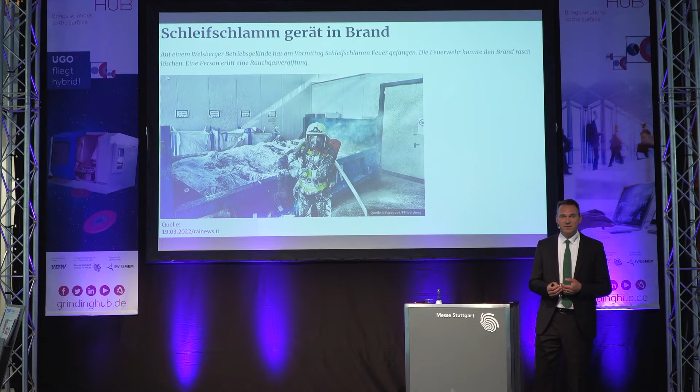So on one side you have the ecological advantages of treating it, and on the other side you can lower the risks of catching fire, damaging the company, or even injuring your staff.

Dr. Helmut Sihler, the former CEO of Henkel, made a good statement some years ago: we have to integrate environmental standards into the daily working processes. Today this is even more relevant than when he made this statement.

If you want to succeed in the market, these standards should be implemented, also looking at your customers and public relations, because no one wants to buy products from you if you have bad news, or your products won't be as successful on the market if your customers feel you're not ecologically friendly.

So what is the state with your sludge at the moment? You collect it at a tooling machine, at a filtering system. You have to sort it on one side, collecting afterwards the separation - coolant, water-based or non-water-based, the material mixture - is it more steel or aluminum grinding sludge.

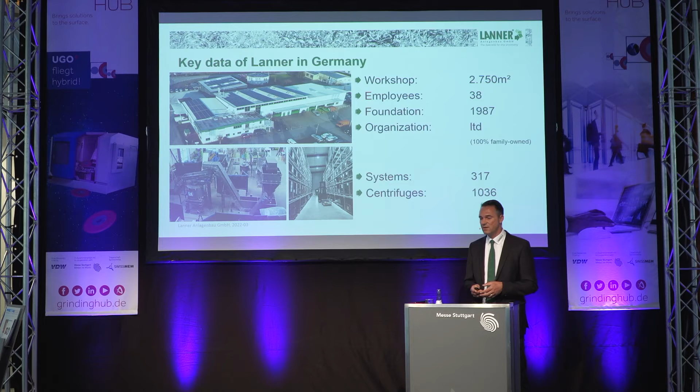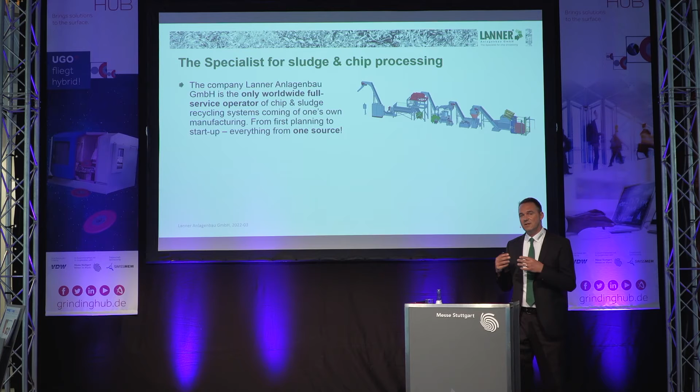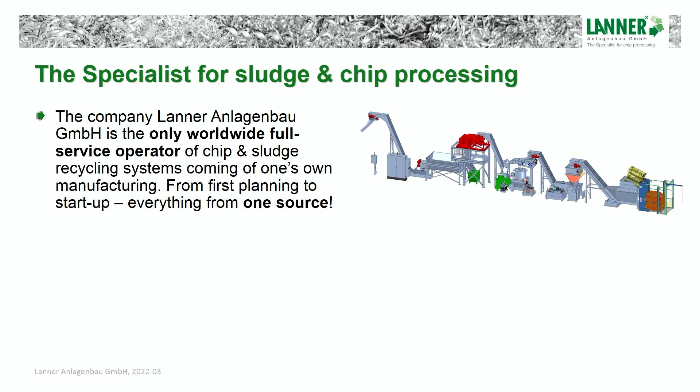We're the only worldwide company supplying such machines and systems from one hand. We produce all these kinds of machines - conveying tanks, crushers, centrifuges, screening, and also separation technologies and container loading systems.

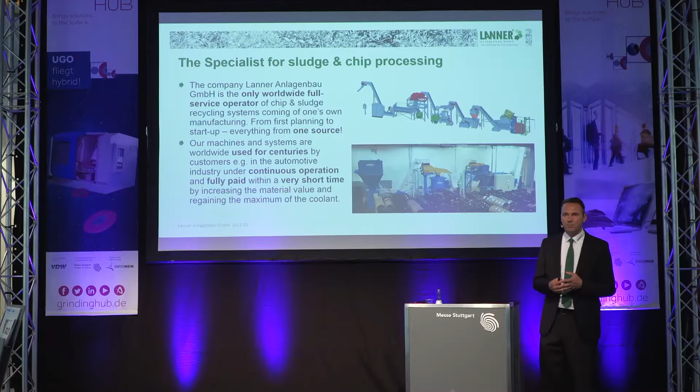This is what it looks like in the real world, back again from the 3D modeling. These systems have a very short return on investment because you're increasing the value of the chips or lowering the disposal costs for the sludge. On the other side, you get coolant back which can be reused many, many times - with oil, nearly an endless recovery and usage.

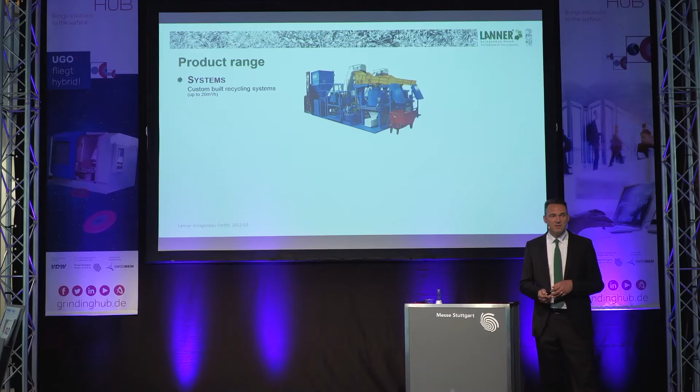We produce systems for up to 20 cubic meters per hour - small turnkey ready systems which come plug and play up to 2 cubic meters, and for the same amount per hour, briquetting presses.

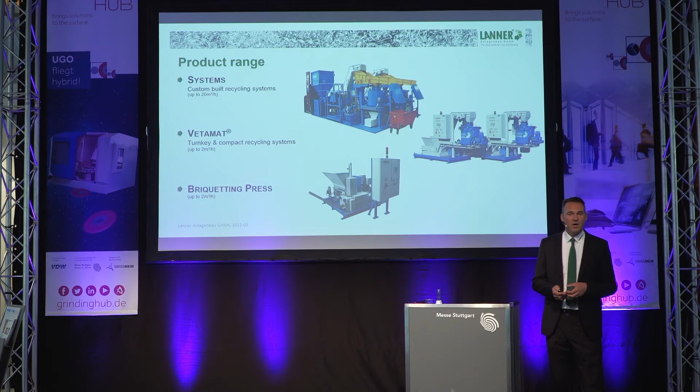So where is the sludge coming from? Of course, from the machining process where you're manufacturing your parts or tools. We collect it via a chip cut or a conveyor, or from the central or decentralized filtration system.

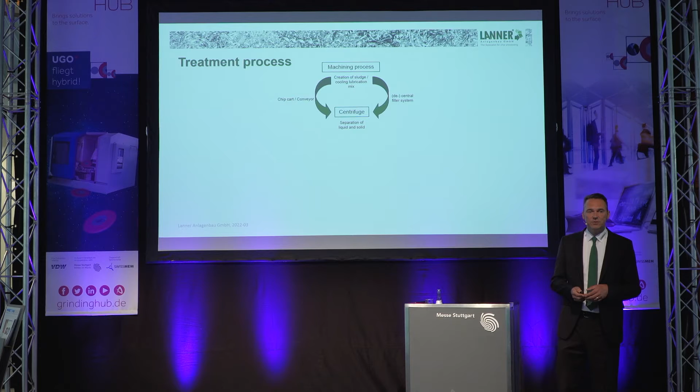It can go to the centrifuge where we separate via physical force the liquid from the solid phase. The centrifuge sludge can go directly also into a briquetting press to press it to a solid briquette and squeeze out the containing liquid, and then this can go to the foundry or the scrap dealer.

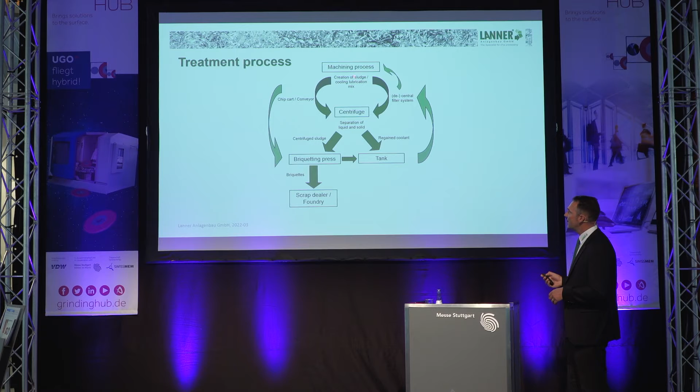The regained coolant is collected in a tank, going back to a filtration system to filter the particles, depending on your demands on the filtration and on the tooling system, and also reused. So we have 2 cycles coming from the separation. On the one side, regained coolant, and the other side, the solid material.

First, the centrifuges, which can be used for treating the grinding sludge. Lanner is producing 3 types of centrifuges, but only 2 of them can be used for the grinding sludge. The first one I want to show you is the ME Batch Centrifuge in detail.

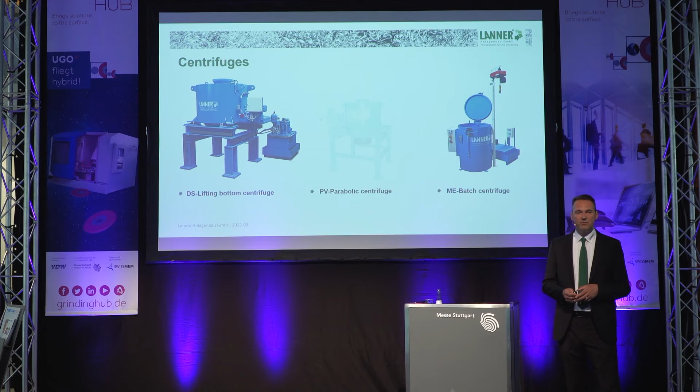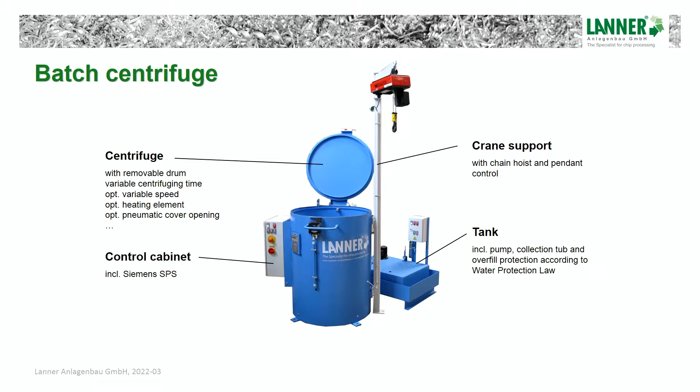It's a very simple system. It can be manually loaded, and if you only have a small quantity, this can be the solution for regaining the coolant from the wet sludge.

This is now a small video. We do it. You can start. Perfect. Here, this is made in our company.

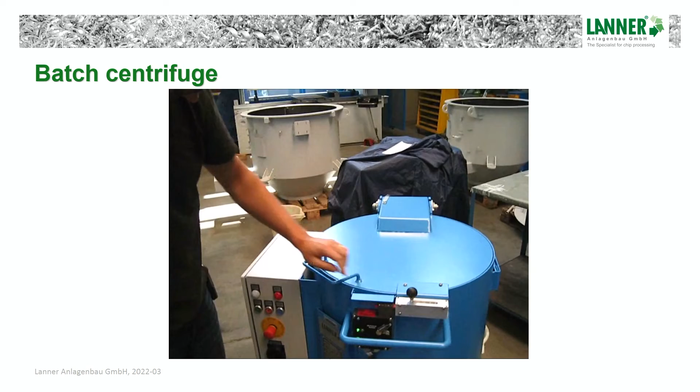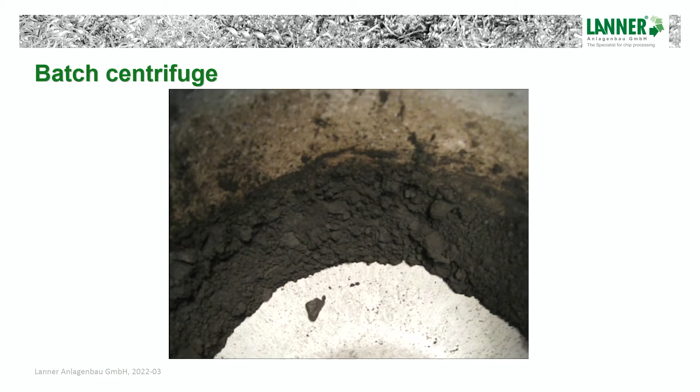You put a wet sludge into the drum. You manually close the lid and start the centrifuging cycle. The cycle time can be set up upon the demands. When the cycle time is over, the sludge is nearly containing no liquid anymore.

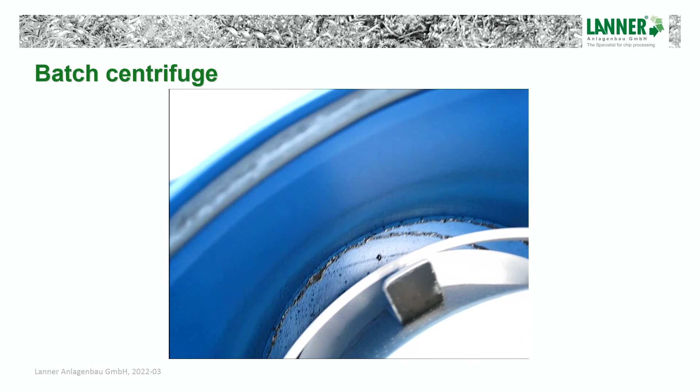The liquid here collected in a small basket and still here in the housing, so you can see there was a separation. Afterwards, you take the drum out and repeat.

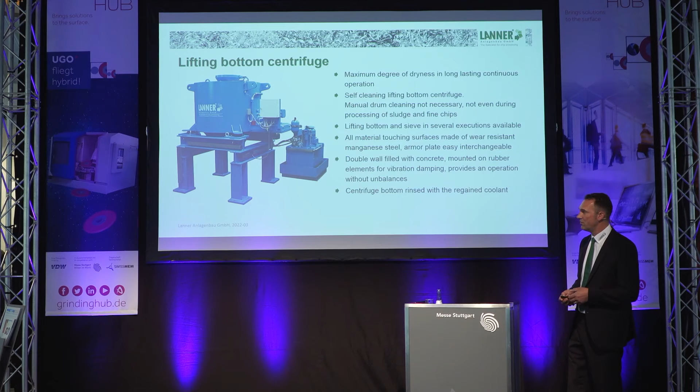The centrifuge here is working continuously, and we have here the material coming from top loading, and the dried material will leave underneath into a cart or a conveyor underneath. The function of this centrifuge is shown here step by step.

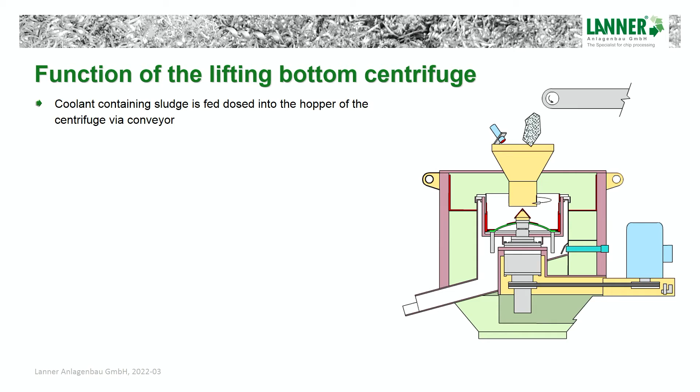The wet sludge enters from top into the rotating drum. We can achieve here about 300 to 400 G, meaning 300 to 400 times the factor of the Earth's gravity. With this force, then the liquid is separated from the solid phase.

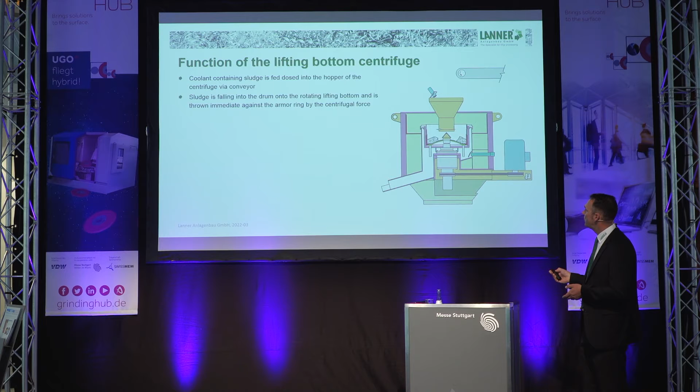The sludge is entering the drum, and through the rotation it is pressed against the wall and forming up ring-shaped. In the lower part of the drum there is a solid ring to catch the impact, and the lifting bottom is pushing this ring upwards onto a slot sieve.

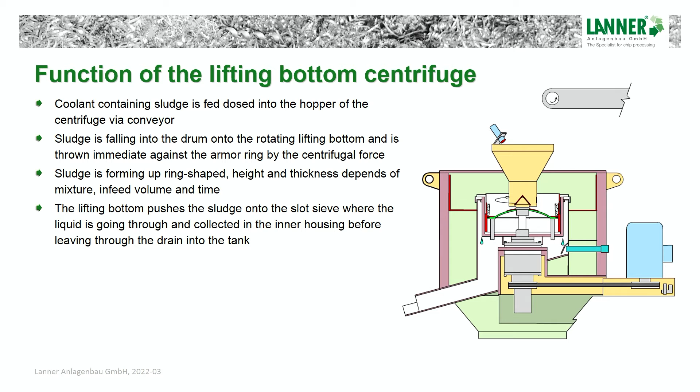Through these slots the liquid will go through and get caught inside the inner housing, leaving the centrifuge. When the lifting bottom is returning into the lower position, this ring stays on the sieve, and with the next cycle this ring is pushed upwards onto the sieve further up.

So we have here a very long time that the sludge is staying on the sieve, and we can achieve as much drying as possible with the centrifugal force. The liquid is separated. When the dried sludge is reaching the top of the drum, it will be thrown outwards.

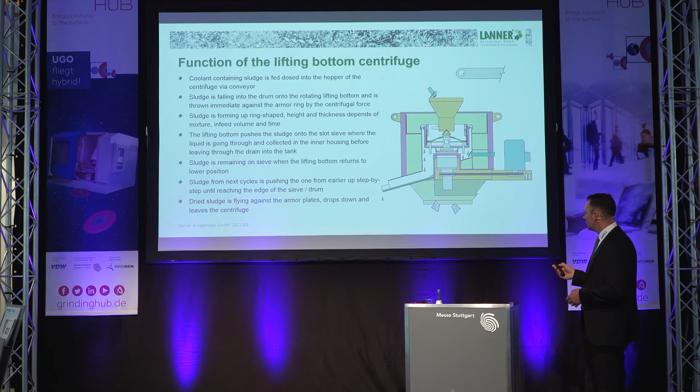Against the inner housing, it will drop down and leave the centrifuge. The cycle time here can be set, but as long as possible, and the thinner this ring is, the better the drying will be at the end.

This is now showing a video of the machine in function. The lifting bottom, you can see here in the center, is moving up and down. In this case then pushing the sludge up onto the sieve.

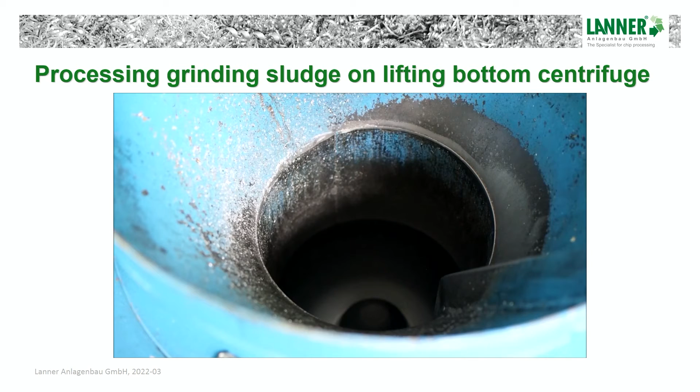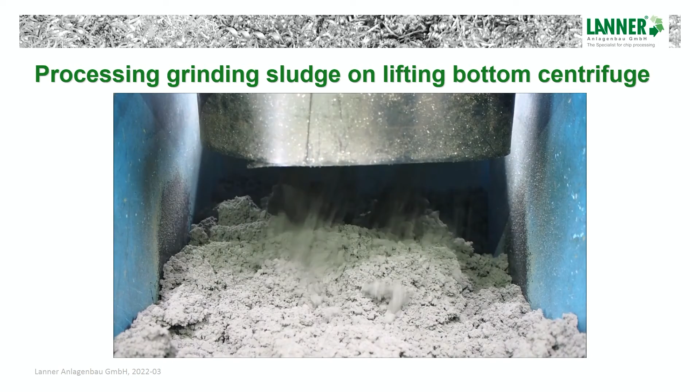New wet sludge was always added manually. This is then underneath the centrifuge. You can see the color has changed, the oil has been separated, and the volume increases a little bit because it's not that dense anymore.

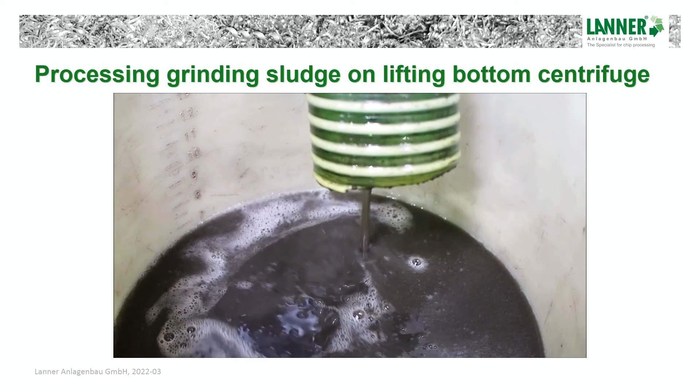This is then the regained coolant. Our experience has shown that sludge can contain up to 60 to 80% coolant in mass. This was regained from a sample of about 40 liters of sludge.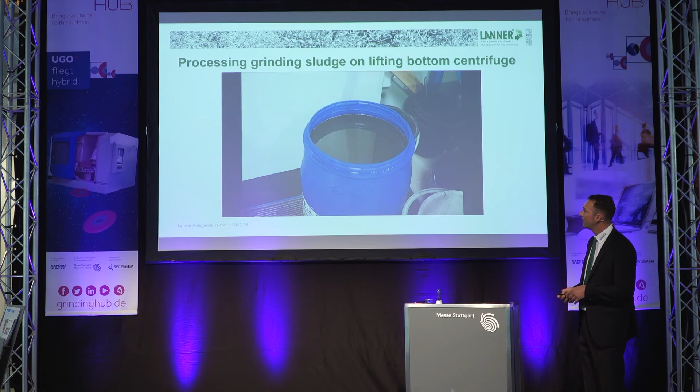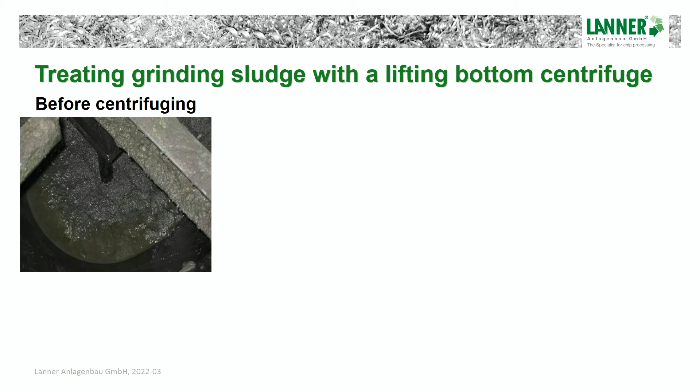Okay, thank you. So, before the centrifuging or the treatment, you have on the one side the very wet sludge. You can see upswimming oil that is not binding in the material.

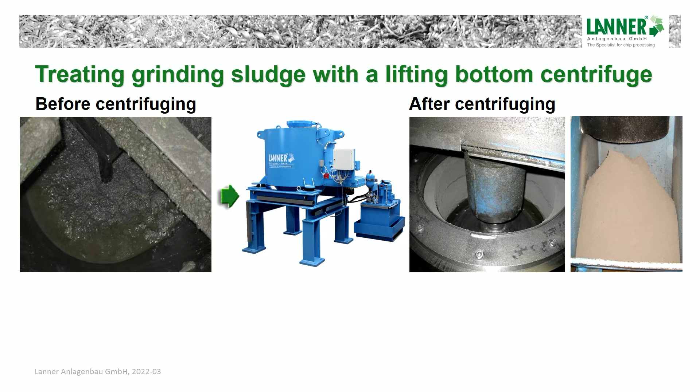With the centrifuge, here picture showing inside that ring-shaped dried sludge, and underneath in the centrifuge again. So the coolant recovery can be up to 90% of the containing coolant in that sludge.

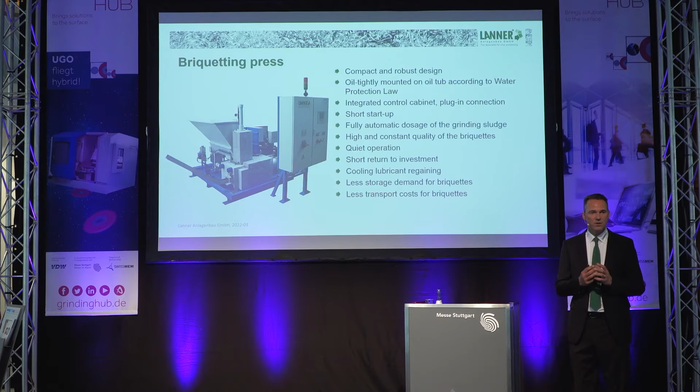A second system that can be used, in addition to centrifuging, is briquetting. The sludge is compacted, and during this process the oil or emulsion is squeezed out, collected, and can be filtered and reused.

The briquetting press consists of a hopper where we collect the wet sludge, a hydraulic unit, a pressing cylinder, and a pressing chamber. The complete machine is set up on a tub, in compliance with the Water Protection Law, to collect dripping liquids and prevent them from getting on the ground.

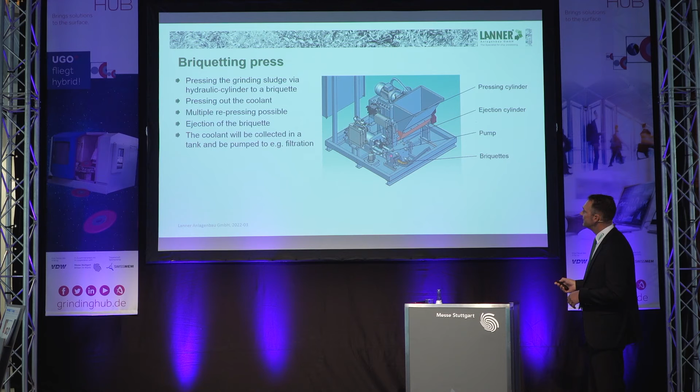The sludge is dosed with a screw into the pre-pressing chamber. The press cylinder then compacts the solid briquette in this chamber, where the coolant is collected and can be further transported with a pump.

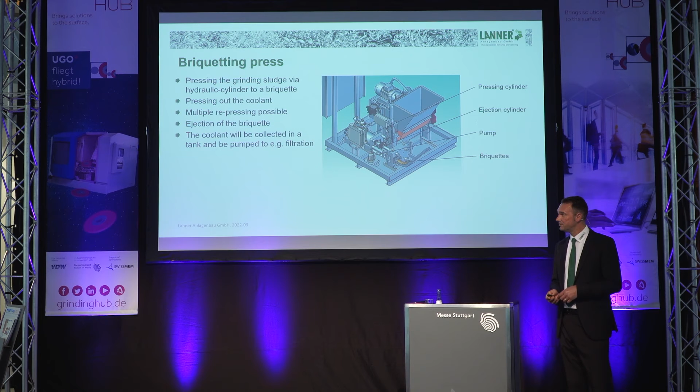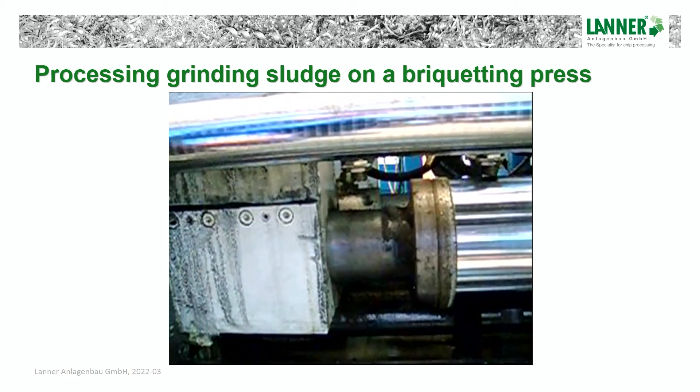Again, a video showing a test we did in our company. The sludge is dosed with the screw into the pressing cylinder, and here the press cylinder is now very slowly pressing the sludge together.

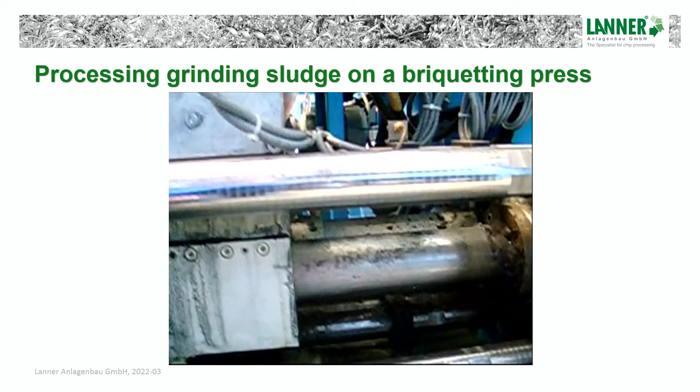We release, then press again. This process of releasing and pressing again can be repeated until you reach the best result. The cylinder can press up to 500 bars, meaning we have a very high force on a small surface, to get as dense a result as possible.

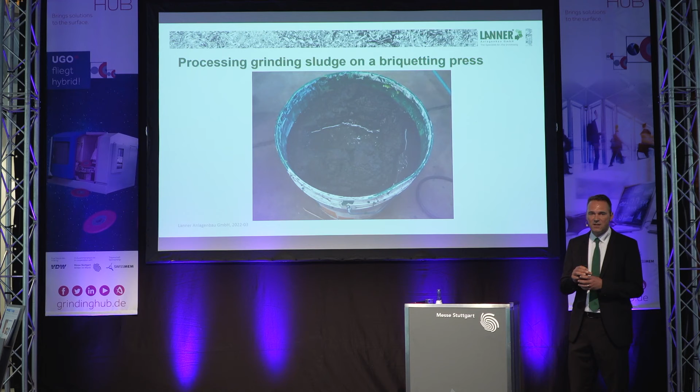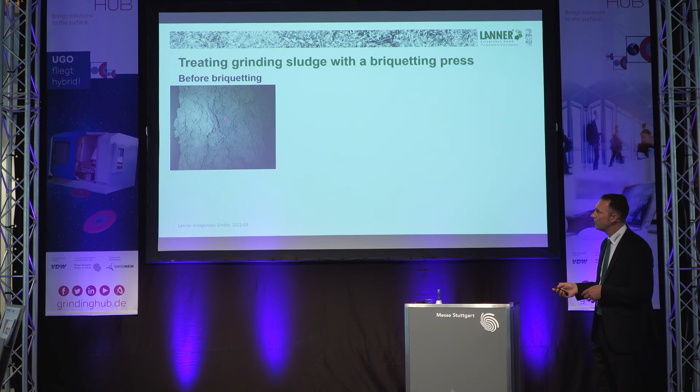Before the press process, the sludge, in this case from a centrifuge, has a loose and large volume. After pressing, you get solid briquettes with a much lower volume. And if you remember the newspaper article, these briquettes have a much lower fire-catching problem than the loose sludge.

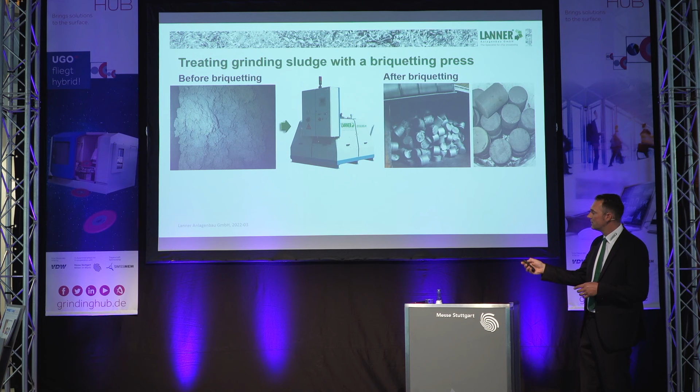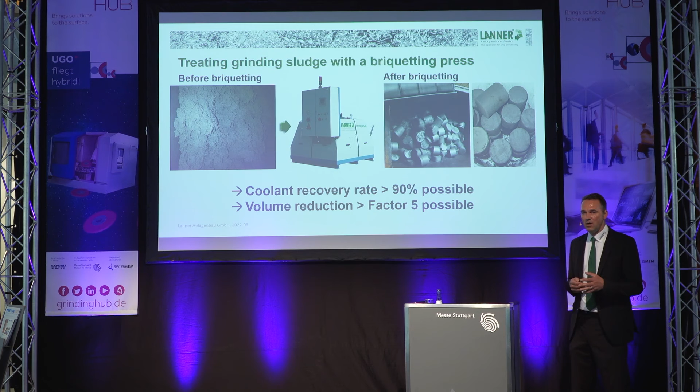The coolant recovery rate here is also possible above 90%, and in addition you have a volume reduction, with a factor of 5 normally achievable.

So, thank you for listening. Keep in mind, recycling is important, and on the other side, you also have a return on investment if you invest in such recycling machines. You can lower all your costs, regain the coolant, save money, and our environment will also say a big thank you to you.